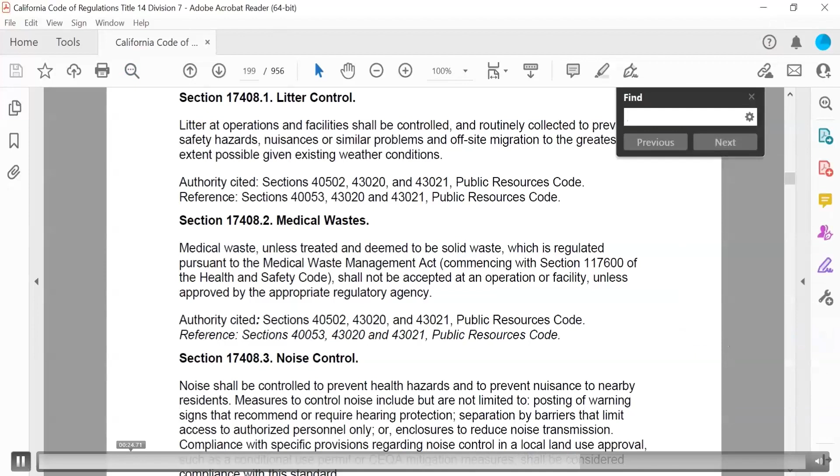Let's say we want to search for the term odor. When we enter our search term, you may notice that a list of suggestions appears. We can search for the term odor, which is found in the document 118 times, odors, which is found in the document 15 times, or odor impacts, which is found once. Let's go ahead and search for odor.

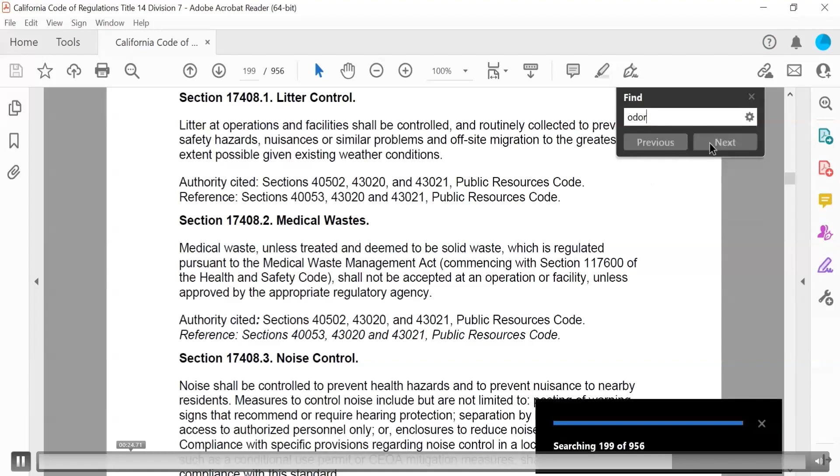You can click Next and Previous to cycle through the different places that the term odor appears in the document. Do take note that when you use the Find tool, the search will begin on the page you are currently on. So if we search while on page 1, it is likely that the search will bring us to the table of contents. However, if you search while on page 100, then the search may begin in the middle of the document.

These basics should help you to quickly find regulations. I recommend saving the PDFs for titles 14 and 27 for easy access. Alrighty, hopefully that helps you a little bit if you're not too familiar with those PDFs.

All right. So statement of standards are either performance standards or prescriptive standards. Performance standards set out expectations and allow for different methods to meet those expectations. So these standards require mitigation measures that minimize impacts, are maintained, and allow for ongoing controls. And when assessing for performance standards, the EA or you will determine if the mitigation measures that are deployed are adequate to protect public health and safety and the environment.

And then for prescriptive standards, these include specific procedures, criteria, or thresholds. And if observations show that the deployed measures and the results of those measures are not consistent with the standards, then a finding of non-compliance can be supported. So prescriptive standards are pretty cut and dry, where specific thresholds are given. If it's not met, then it's not in compliance. Whereas performance standards offer a little bit more flexibility as far as methods to control or minimize, etc.

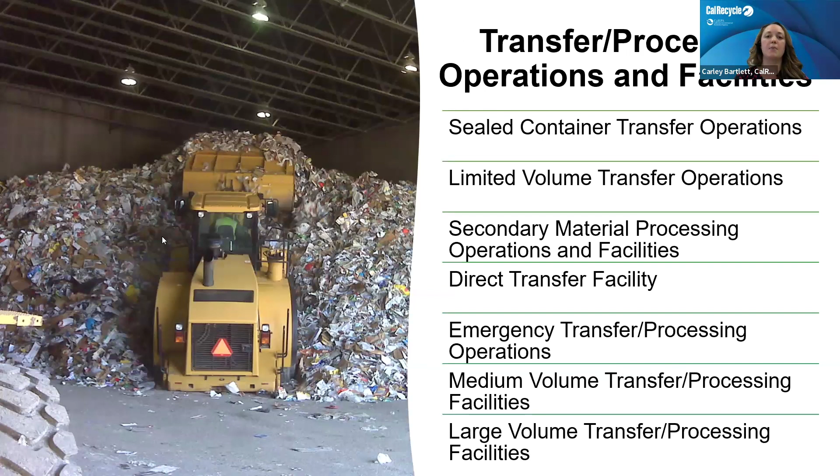Another facility or operation type that we're going to talk about are transfer processing sites. These are facilities or operations that receive, temporarily store, handle, recover, transfer, or otherwise process solid waste. These operations or facilities can also transfer the solid waste directly from smaller to larger vehicles for transport or be utilized for transformation. These facilities are categorized by the type and volume of material accepted.

The regulations for transfer processing sites are found in Title 14. These articles contain regulations that cover general design requirements and siting, operating standards for both operations and facilities, so things like dust control, hazardous waste, noise control, litter control, etc. Article 6.3 covers record keeping requirements. Article 6.35 contains some additional operating requirements for facilities only, so things like communication equipment, site security, site attendance.

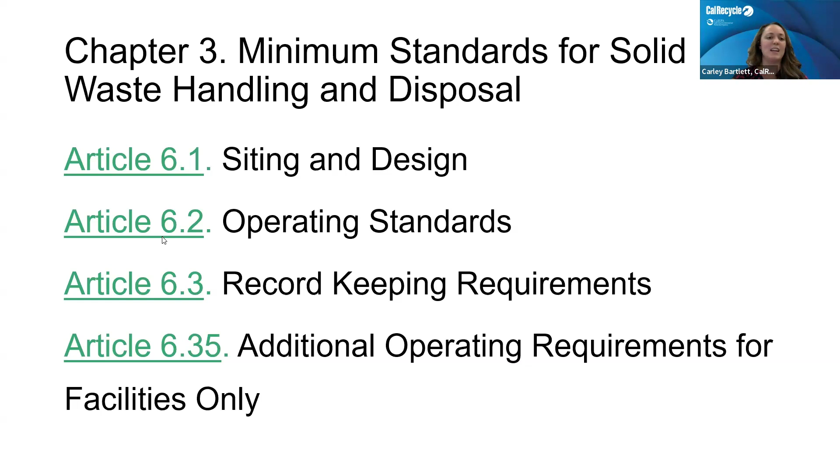Compostable materials handling operations and facilities are permitted by the type of feedstock they accept and the volume of material that is accepted. The regulations for these sites establish standards and regulatory requirements for both intentional and inadvertent composting resulting from handling of compostable materials, so things like feedstocks, compost, chip and ground materials, etc.

The regulations for composting sites are also found in Title 14, and you might be starting to see a pattern here. The articles contain regulations on siting and design, operating standards, site records. Composting sites, though, do have specific articles that contain environmental health standards that cover things such as maximum acceptable metal concentrations in compost and pathogen reduction. There is an article on composting facility site restoration. We're not going to cover that in today's training, but it is there if you are interested.

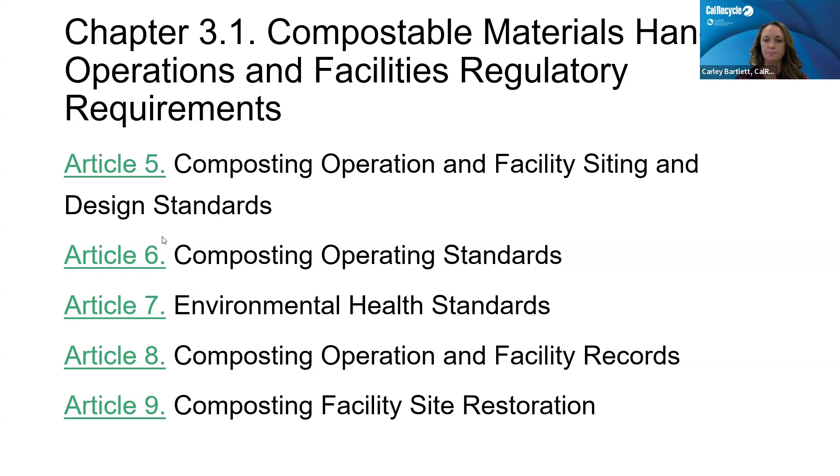The last type of solid waste site that we'll cover today are in-vessel digestion operations and facilities. These are sites that receive solid waste for the purpose of digestion in an in-vessel digester, which is a sealed container or a sealed structure in which the entire digestion process occurs. As we've seen in the sites before, the permit depends on the quantity of material processed and the type of feedstock being received.

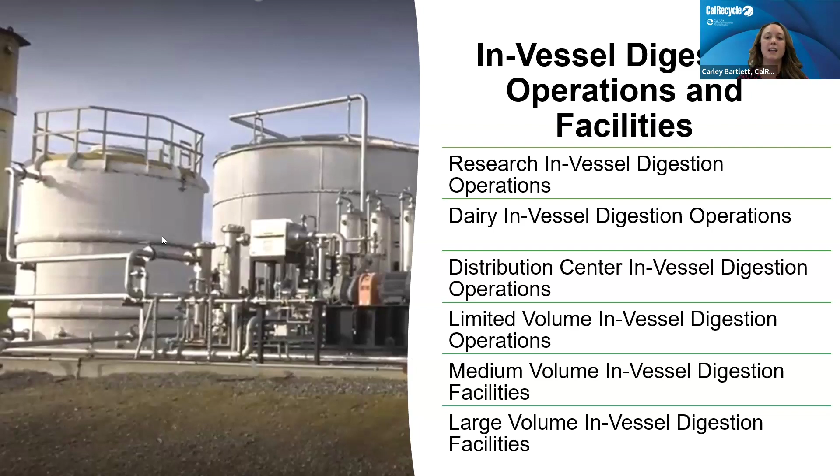The regulations for these sites can be found in Title 14 as well. The articles reference siting and design, operating standards, record keeping requirements, additional operating requirements for facilities only, just as we saw with transfer processing sites. For in-vessel digestion sites, there is also an article to cover digestate handling standards. These include standards on maximum acceptable metal concentrations and pathogen reduction in digestate produced at these sites.

All right, so we have another poll for you, poll number 2. Which facility type is most common in your jurisdiction? Do you have mostly disposal sites, transfer processing sites, compostable materials handling sites, in-vessel digestion sites, or other? I know a lot of folks have closed landfills in their jurisdictions, and we're not going to be covering closed landfills today, but just wanted to give you the option to put that in there.

Right off the bat, I'm seeing most of you have transfer processing sites as the most common type of facility in your jurisdiction, which does not surprise me. That's what we've been seeing in all the trainings, actually. Some folks have disposal sites as their most common site, and then some compostable materials handling, and one other. So I'm assuming that's going to be a closed landfill.

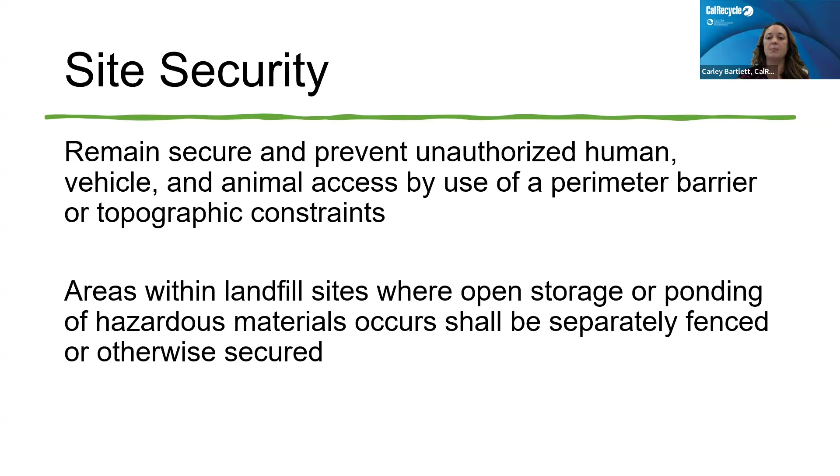As far as maintenance, roads, and equipment go, you should be looking for any issues regarding the state of equipment and site maintenance. The site should be maintained in a good state of repair, and the operator should be implementing a preventative maintenance program to monitor and promptly repair deteriorated or defective conditions. Any on-site roads or driveways should be designed and maintained to minimize the generation of dust and tracking of soil onto adjacent public roads. We'll talk more about dust later on. Those roads should also be safe and maintained to allow vehicles reasonable all-weather access, obviously.

We'll talk about this more too in detail later, but there's going to be circumstances where weather brings big storms that are unusual for the area. There's going to be times where things are just out of our control, right? But those roads still need to be able to allow for reasonable all-weather access.

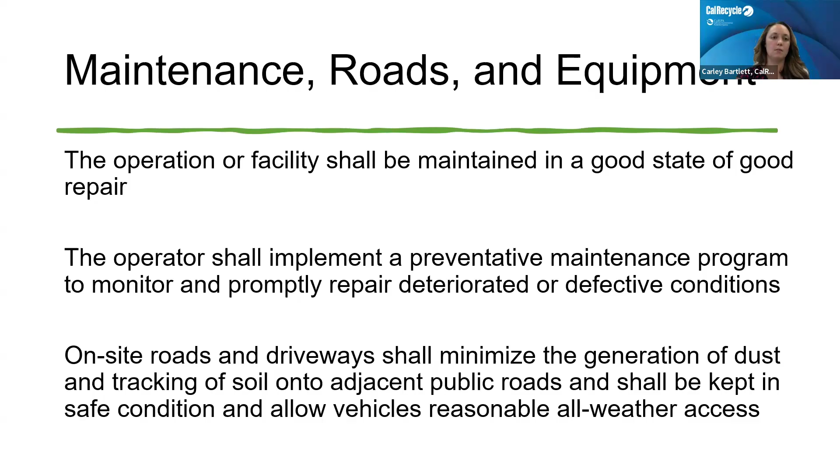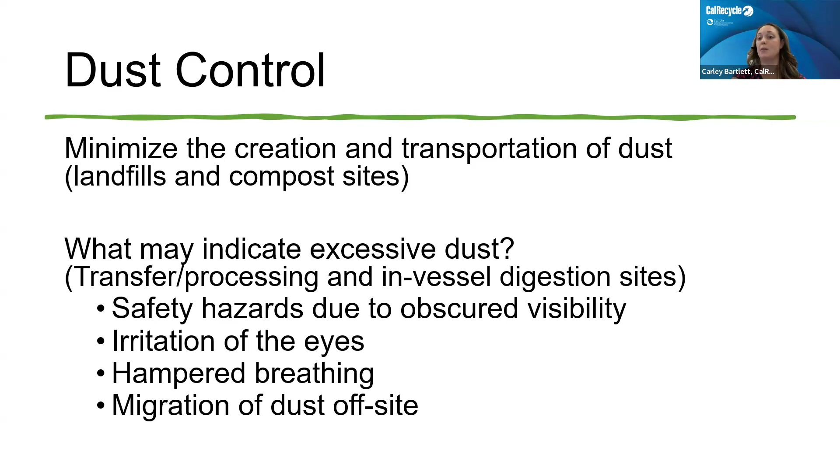Measures to control dust include reducing processing, periodic sweeping and cleaning, misting systems, or ventilation control. You can determine if these control measures are not working if you observe dust accumulating on or off site. Look for dust accumulation on stairs and handrails, dusty conditions within buildings or on-site structures, and definitely observe areas where folks are working—we don't want inhalation problems there, so make sure those buildings are clear of dust.

And make sure that there's minimal dust in areas where the public is offloading waste or on public roads offsite as well.

Traffic flow into, on, and out of the site should have minimal interference with traffic on adjacent public streets or roads, and the operator should control on-site safety hazards and interference with site operations.

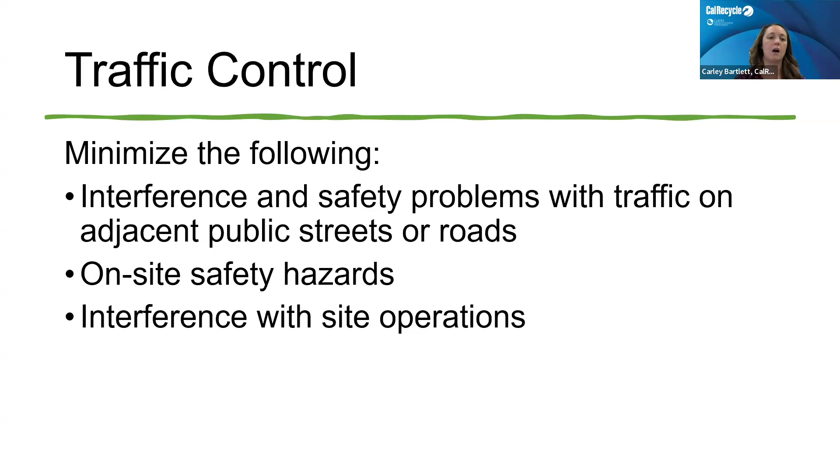Another thing to look for is noise control. Noise should be controlled to prevent health hazards and nuisance to nearby residents. Some measures to control noise include enclosures to reduce noise transmission and altering operating hours. Compliance with the standard should be met if the operator is following the design and operational procedures, but you can always inspect areas offsite to check noise levels and determine if they're being controlled.

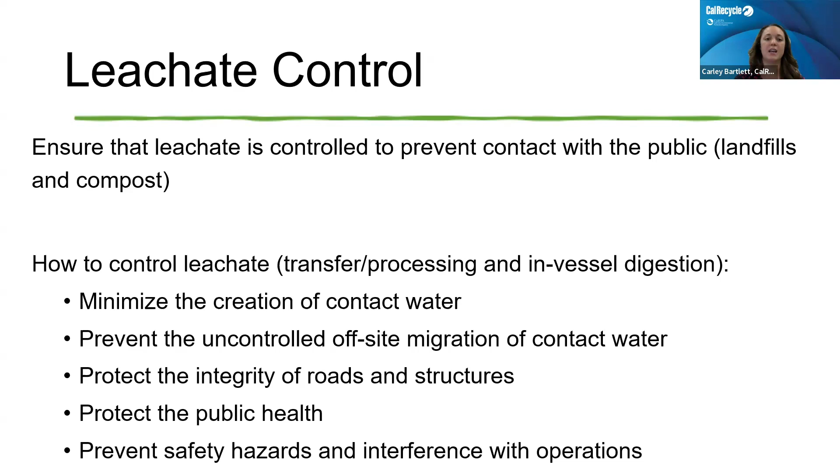So minimizing the creation of contact water, preventing contact water from migrating off site, and protecting public roads in general, structures, and public health. And ponding is usually related to maintenance issues such as potholes or low spots in roads or operating areas. So if you do find leachate, look for oily sheens and odors, especially because these can lead to other problems down the road, like, again, odor issues or vector harborage areas.

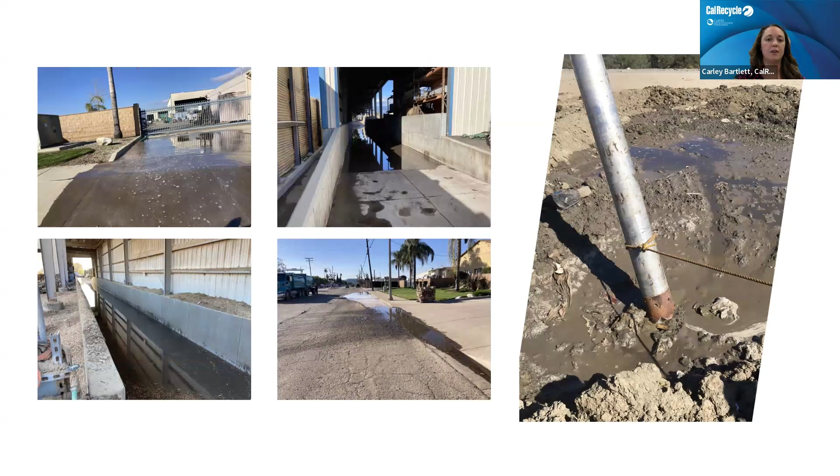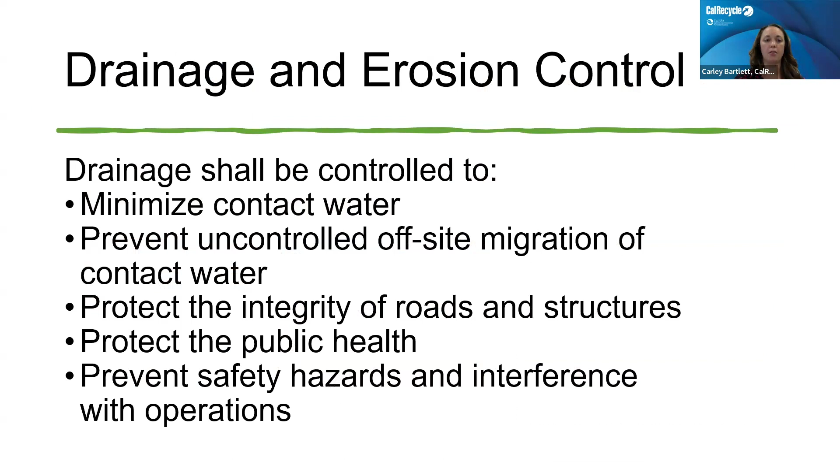So in general, the drainage and erosion control measures are written the same for leachate control. Operators should be minimizing contact water, preventing offsite migration, protecting roads, structures, and public health. And drainage and erosion issues are typically related to maintenance and weather events. So if a lack of maintenance in typical weather is causing problems, then you may need to reassess any control measures that are listed in the operating documents.

However, unusual and extreme weather events that cause problems may not be cause for a violation so long as the operator addresses the problem in a timely manner. And unfortunately, it seems like these unusual and extreme weather events become more and more common. So it's good to keep that in mind, especially because if we are seeing these problems more often, operators are going to have to be dealing with the potential consequences. So being prepared is always a good thing to keep in mind.

And then lastly, for control, we have nuisance control. Titles 14 and 27 state each operation or facility shall be operated and maintained to not create a public nuisance. So for Title 27, the regulations state that disposal sites should be operated and maintained not to create a public nuisance, which is defined in the California Penal Code.

Public nuisance, again, is defined in the California Penal Code. Whereas other sites, so like transfer processing, composting, and in-vessel digestion sites, should be preventing the creation of a nuisance, which is defined within Title 14. So just wanted to point out that there's a slight difference in the wording in the regulation and also the definitions of those terms, just to keep that in mind.

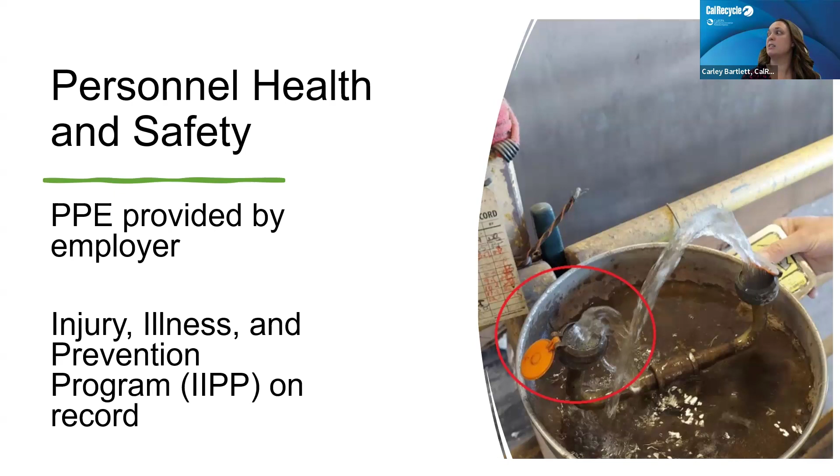The site, however, should have an injury, illness, and prevention program or an IIPP on record. It is not your responsibility to enforce the IIPP, but it is your responsibility to make sure that there is an IIPP on record. Emergency response measures are critical. Each facility should have adequate communication equipment available to site personnel to allow for quick response to emergencies. So look for spotters to be carrying radios so they're able to get a hold of somebody to deal with that emergency as quickly as possible.

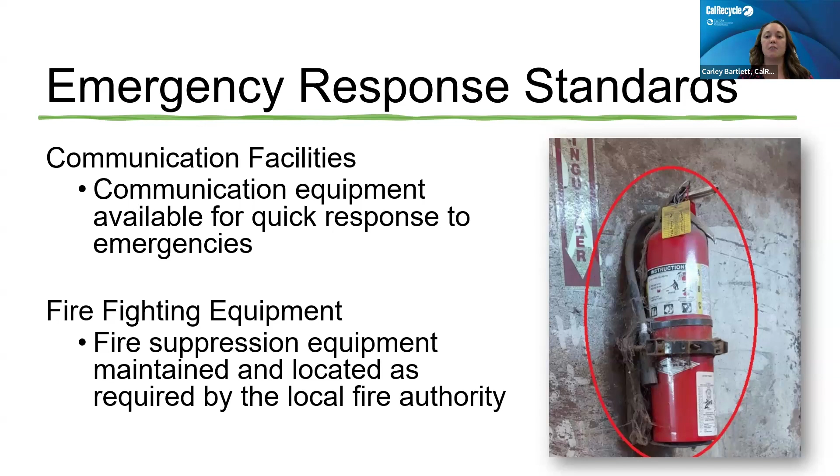So each facility should also have fire suppression equipment continuously available, and it should be properly maintained and located as required by the local fire authorities. So I can't tell you how many times I've seen photos of fire extinguishers looking like this, where it's covered in cobwebs and dust, and oftentimes there's a pile of stuff right in front of it. So clearly it's not accessible, but it also hasn't been maintained. So again, look for unserviced fire extinguishers and clear access to fire suppression equipment.

Yeah, so we have no traffic control and we have no spotters. Right. So there we go. So any site, oops, missed a slide, I don't know what happened there. So yes, we need to have a spotter, right? So especially when there's a facility or an operation that has a lot of vehicle traffic, there needs to be a spotter making sure that that traffic is being directed, and then also that folks are staying safe.

There was a photo or video, I can't remember, that I saw where the truck driver was gonna off-haul some waste, exited the truck and was climbing into the trailer to who knows what, maybe unjam something, but definitely not a safe thing to be doing. So having a traffic spotter or just a safety spotter in general would help prevent that instance from occurring, and also any potential injuries from occurring as well.

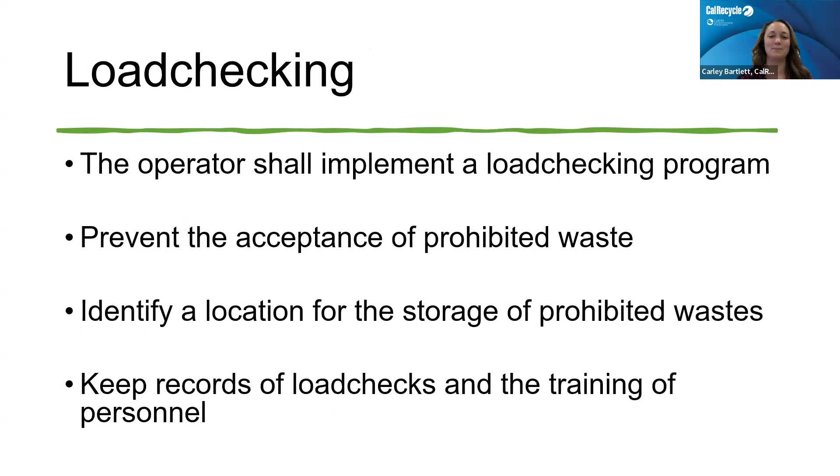So first and foremost, how can you determine if load checking is occurring? Well, you can look for load checking records and determine if those load checks are being documented or if load checking is even occurring. So take a look at the records. Oh, great, there's load checking documents here. Chances are that it's actually occurring. If there's not documents there, okay, well, we're either looking at the documentation's not being done and or the load checking is not occurring in the first place.

So a good way to determine if load checks are occurring is to look for waste that the facility does not accept. So like e-waste at a C&D site or treated wood waste or other hazardous waste. While at the site, watch the load checking process and observe how thorough that process is. Are the load checkers just looking under a tarp real quick, saying, you're good? Or are they actually walking around the vehicle, making sure that the waste is acceptable or not? Are they watching the waste offloading process from larger trucks and making sure that that waste is acceptable and not hazardous?

Also make sure that there's a specific area for conducting a more extensive load check if any prohibited materials are suspected. And again, making sure that personnel training records are available. Again, we'll talk about record keeping a little bit later on, but record keeping is definitely critical, especially for load checking as far as employees are concerned. So in general, sites should not be accepting hazardous waste.

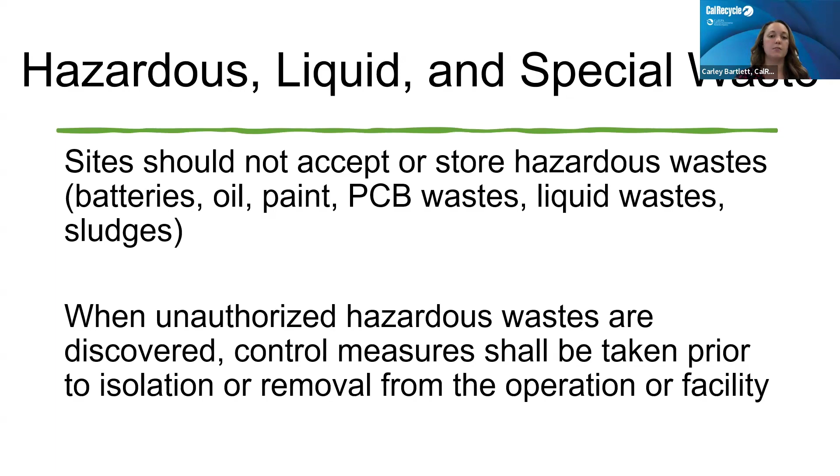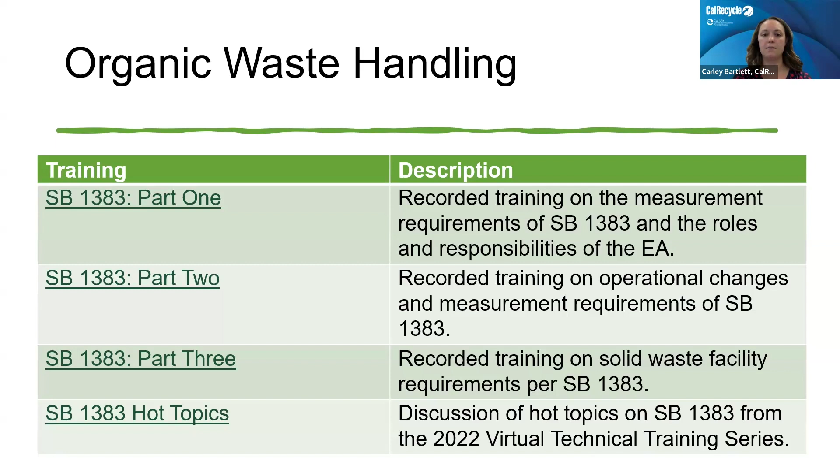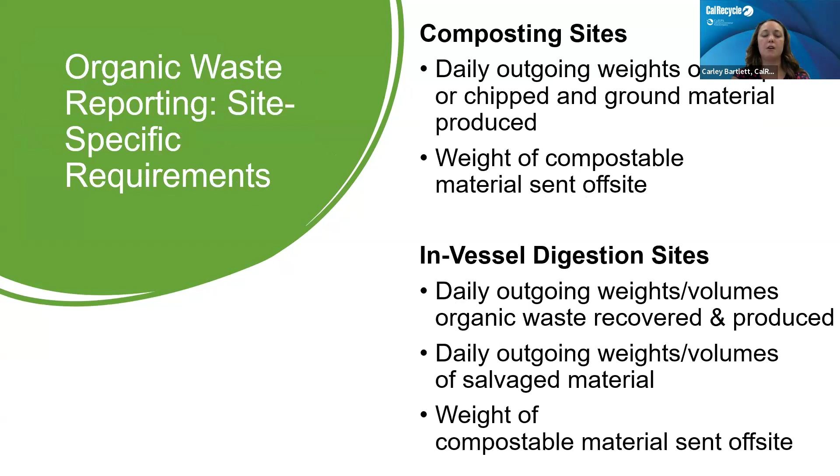And then there's also some organic waste reporting requirements. I'm going to skip over these ones for now, but those all are listed in that resource document that I've mentioned. Alrighty, so we're going to go ahead and jump over to a breakout room activity. Now that we've covered general standards that do apply for all solid waste sites, we're going to start diving into facility-specific standards.

So for the facility-specific standards section, we're going to be working in breakout rooms to create a slide. Each breakout room will be assigned a regulation, and you must work with your team to find the regulation in either Title 14 or 27, and then work together to put together a slide. We're going to be doing this activity in Google Slides, so you can all hopefully edit the slides. We will be posting the assignments and the links to the slides in the chat momentarily. Once you are assigned a room, you should be able to access those links according to whichever room you are assigned.

So basically, just like earlier, you're going to be prompted to join your room. You're going to introduce each other and choose a facilitator, and I will have these slides shared out to the breakout room on my end. Once you've done that, you're going to work with your team to create a slide. Each breakout room will have a CalRecycle staff member to help with any technical issues, and they will be sharing their screen in case any of you are unable to open the Google Slide document.

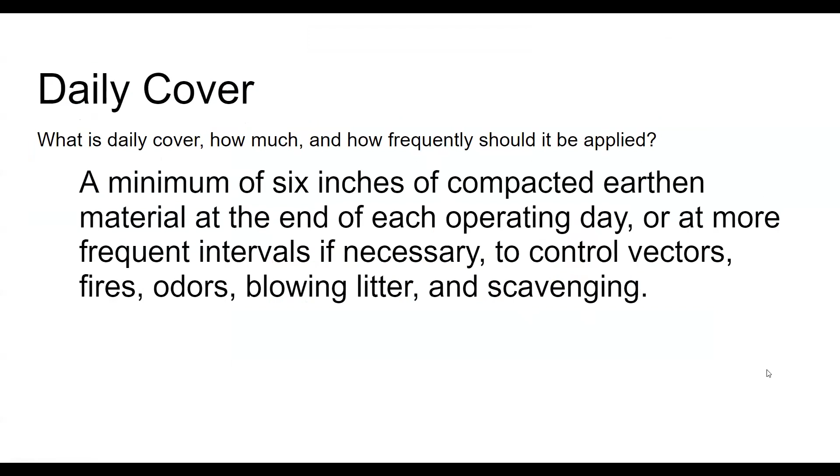Perfect, thanks Adam. Yeah, that one's pretty straightforward. And I like that you included 'more frequent intervals if necessary to control vectors, fires, odors, blowing litter, and scavenging.' Again, this is where you're able to use implementation tools like permits, terms and conditions, etc., to implement more stringent standards or requirements than what's listed. So that's always an option.

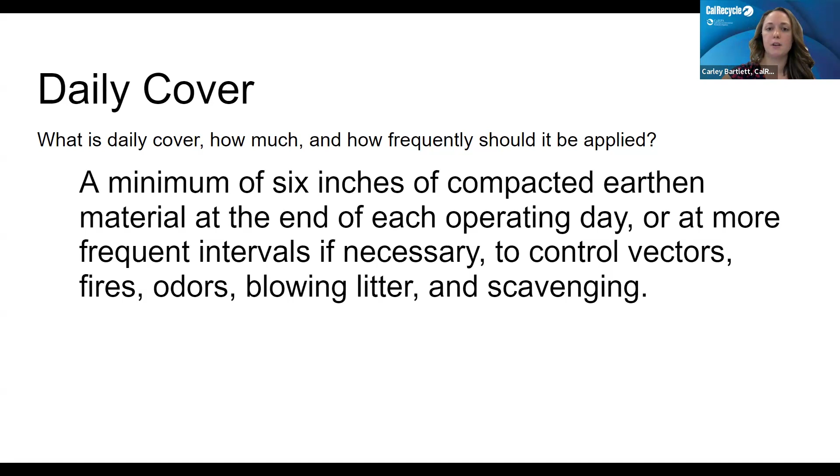Melissa, could you go to the next slide real quick? I do have a couple extra things I wanted to chat about. There are allowances for daily cover materials other than compacted earthen material, referred to as ADC, or alternative daily cover. All types of ADC must be approved by you, the EA, in writing prior to use.

Next slide, please. So here's a list of the 11 approved ADC material types per Title 27 CCR 20690. The use of any of these 11 approved material types does not require a site-specific demonstration project. This section also prescribes the required depth for each of these material types.

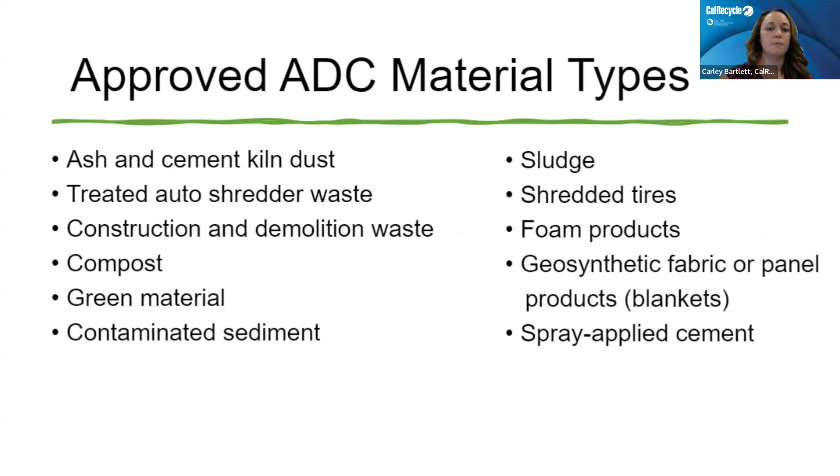And then next slide for a couple photos. So things to look for is whether the operator is using the appropriate cover material as described in the operating documents. Look to make sure the daily cover or ADC is in place by the end of the day, and that it's still in place and effective by the next morning before operations begin. You can look for any loose waste and unraveled covers, and if tarps are being used, make sure there are no tears or holes. All right, thank you so much, breakout room 2.

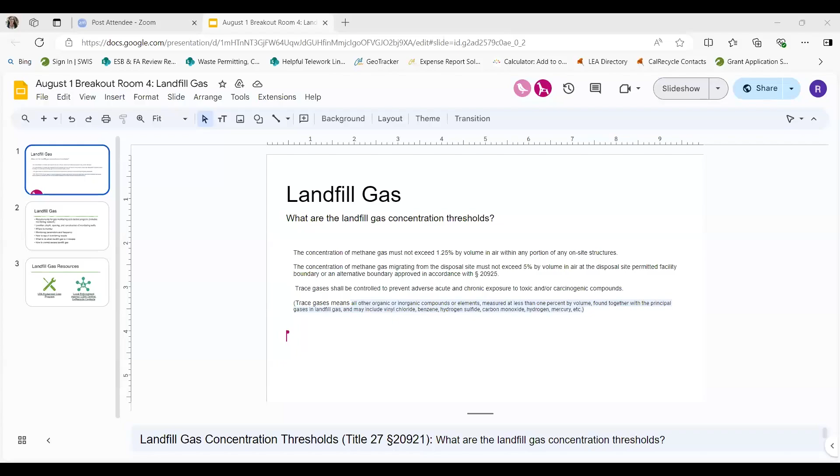Okay, so under Article 6, 27 CCR 20921, subsection A is primarily what I would look for initially, because that's where it quantifies your 1.25% and 5% threshold limits, and also mentions trace gases. Subsection B has EA filing requirements and CIWMB concurrence and timeline requirements.

Let me jump back over to cover that real quick. The concentration of methane gas must not exceed 1.25% by volume in air within any portion of any on-site structures, and the concentration from the disposal site migrating from the disposal site must not exceed 5% by volume in air at the disposal site permitted facility boundary. And then there's trace gases.

With trace gases, we had to navigate out and back to specific definitions, and we pasted in the text there for those definitions. We also talked about how, if that did not address a certain question regarding whether a trace gas is subject or not subject to control measure requirements, we would reach out to CalRecycle staff for support on that. Is there anything I missed, Kathy, or Rachel? No, this looks good. No.

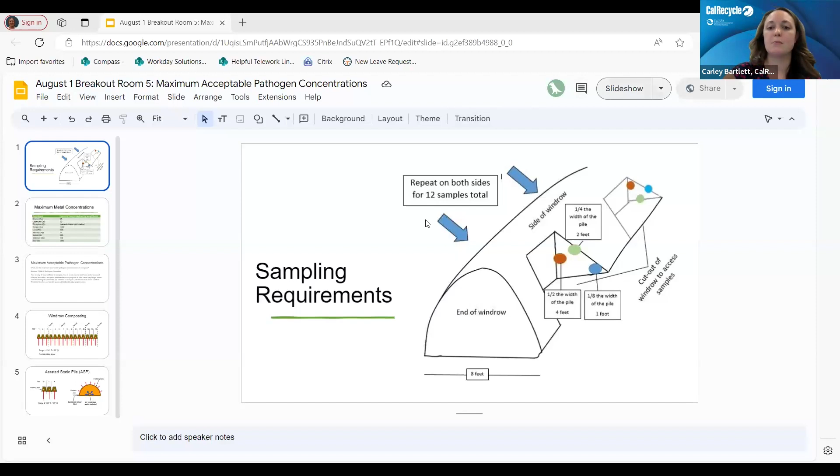I had you guys talk about or cover maximum metal concentrations, but I did want to talk about sampling. I'm sorry, you guys covered acceptable pathogen concentrations, I wanted to cover sampling and metal concentrations before we get there.

Environmental health standards require compost to be sampled for metals, pathogens, and physical contaminants. There's a requirement that compliance with these standards is verified prior to the point where the compost is removed from the site or beneficially used on site. The regulations prescribe a method for obtaining a random and representative composite sample from compost windrows. On the screen here is a diagram showing what is required for obtaining samples. The protocol requires the operator to take 12 samples from 3 different depths, each at a different cross section. So essentially, if an operator is taking at least 12 samples, although they're welcome to take more, they would be required to cut out 4 different spots within the windrow.

Visually, we're only able to see 2 of those cutouts here on one side of the windrow. Within each of those cutouts, the operator should be taking a sample from each of 3 depths. Red is 1/2 the width of the windrow, green is 1/4 the width, and blue is 1/8 the width. Doing this 4 different times allows for a composite sample of at least 12 mini samples to create 1 composite sample.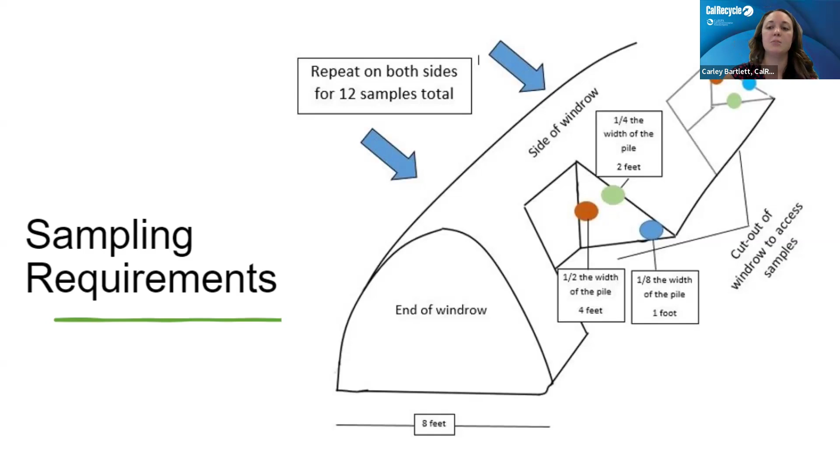Operators should be sampling for environmental health standards every 5,000 cubic yards of compost produced, and if sites produce less than that, they should be sampling at least once every 12 months.

Next slide please. Once a sample is taken, it must be sent to a California Department of Public Health certified laboratory, a CDPH certified laboratory. Compost shall not contain metals in excess of the concentrations listed here on the slide. You may note there is no maximum concentration for chromium, but it still should be measured and recorded.

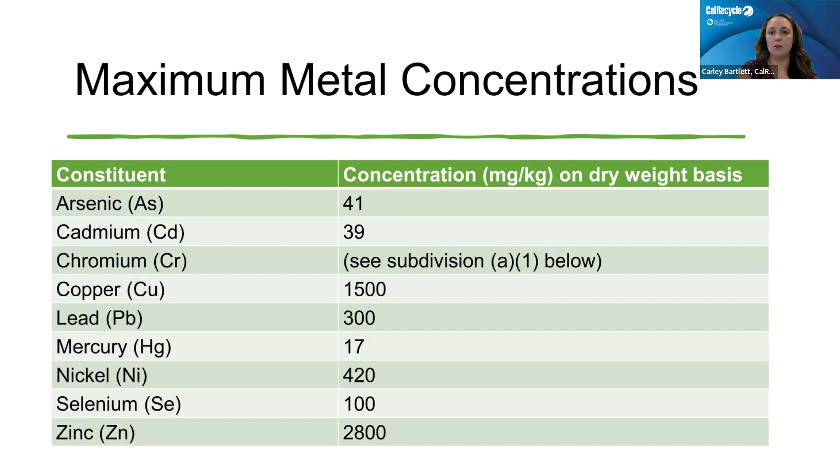Now that we've covered those, I'll go ahead and pass it over to our breakout room 5 facilitator to talk about maximum acceptable pathogen concentrations.

We were assigned what are the maximum acceptable pathogen concentrations in compost. We found that in section 17868.3, pathogen reduction: the density of fecal coliform in compost that is or has at one time been active compost shall be less than 1,000 most probable number per gram of total solids, dry weight basis. And the density of Salmonella bacteria in compost shall be less than 3 most probable number per 4 grams of total solids, dry weight basis. That's what we found in that section.

That's it. So again, we're looking at specific thresholds, specific quantities, prescriptive standards. If an operator or site is not meeting these concentrations or is in excess, then they're not in compliance with that standard.

Next slide, Dana. So how must pathogen reduction occur in compost windrows? For windrow composting, which has the longest pathogen reduction period, active compost should be maintained at a temperature of 131 degrees Fahrenheit or higher for a period of at least 15 days. Windrows should be turned at least 5 times during that period. Temperature readings should be taken every 150 feet to 200 cubic yards of compost for each day of pathogen reduction, so once a day for 15 days or however long the pathogen reduction is occurring, and that should be taken at least 12 to 24 inches below the windrow surface.

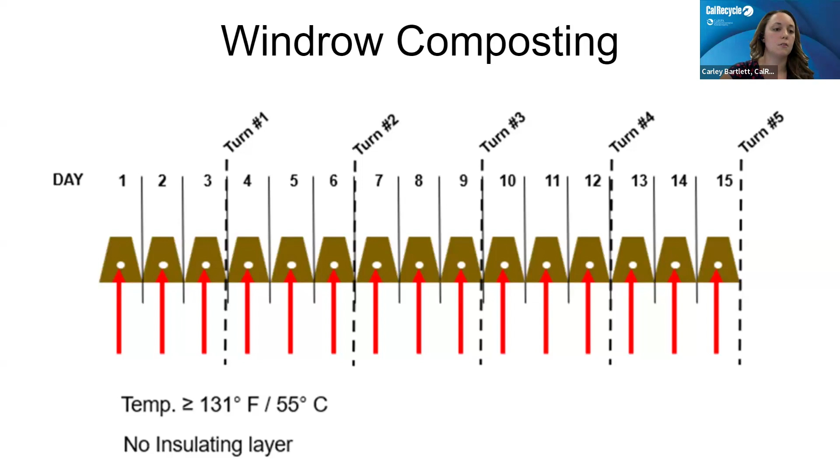Next slide. For the aerated static pile composting process, all active compost shall be covered with 6 to 12 inches of insulating material. Again, the active compost shall be maintained at a temperature of 131 degrees Fahrenheit or higher for 3 days for pathogen reduction. Temperature should be taken once every day, per 150 feet to 200 cubic yards of compost, and taken 12 to 18 inches below the point at which the insulation meets the active compost. So if the operator is using 6 inches of insulating material, the temperature probe should be down to at least 18 inches within the entire pile itself, taking that temperature in the active compost while trying to avoid the insulating layer.

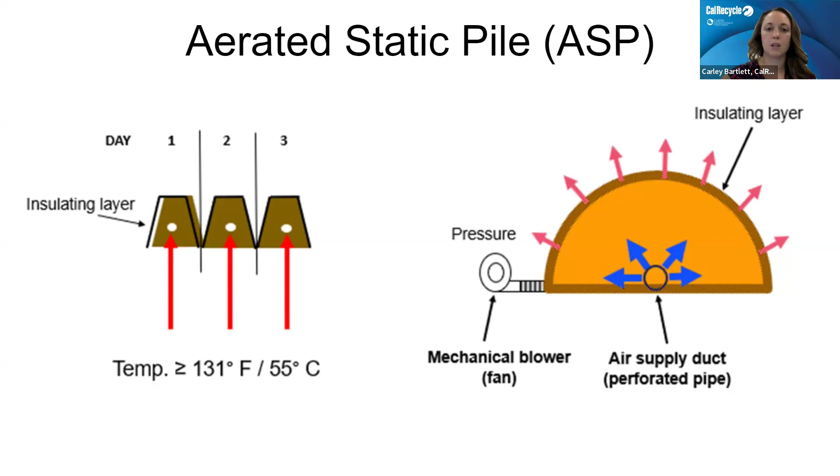Thank you so much, breakout room 5. We have one more, breakout room 6, and they covered physical contamination limits for us. I'll go ahead and pass it over to breakout room 6.

Okay, so for physical contamination limits, we were told to look up the regulations in the compost. In addition to visual observation of the compost, the operator is also required to do the physical contaminant limit testing in the lab. The regulations state compost shall not contain more than 0.5% by dry weight of physical contaminants greater than 4 millimeters - I think that's the most crucial point, that 4 millimeter limit. There's also another condition that states no more than 20% by dry weight of this 0.5% shall be film plastic greater than 4 millimeters. And if the compost material contains in excess of this limit, then it should be designated for additional processing, or disposed of accordingly. That's the main requirement in the physical contamination limits.

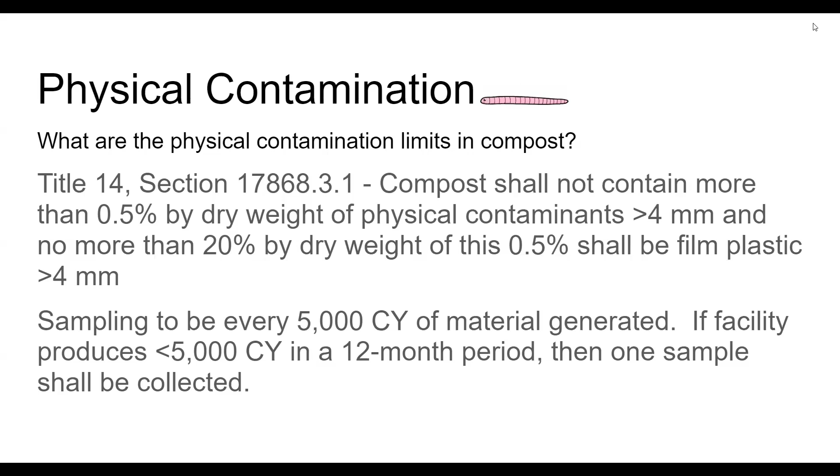And the second thing, as you had pointed out, sampling has to be done for every 5,000 cubic yards of material generated, and if it's less than 5,000 cubic yards in a 12-month period, then they have to sample it once.

Yes, absolutely. Perfect. Thanks so much, breakout room 6.

And then just real quick, as far as meeting this standard, one option is, well, for finer compost material, oftentimes operators are just going to take that composite sample and send it to a lab for analysis. However, for coarser materials, it is an option for operators to use the FIM method, or the field indicator method. I have a link in the resource document if you're interested. And that allows for operators to estimate physical contamination limits in coarser materials out in the field.

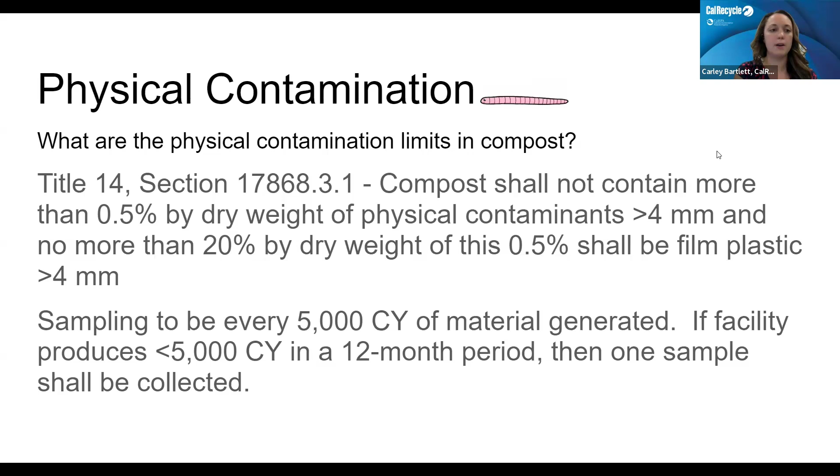So I'm not going to have too much time to cover that. So just something to look into if you're interested. Next slide, I do want to talk about compost fires and odors real quick, since we're on the topic of compost.

And by the way, I love the little worm. It's very cute.

Compost fires are a common issue at composting facilities. And in order to prevent fires, the operator should be monitoring the temperature of compost windrows and piles. They should be stocking adequate water supply for fire suppression, and isolating any potential ignition sources from combustible materials.

And although that's required of the operator, you are always, as an EA, able to take a probe with you and stick it in a windrow and see where they're at. That's going to help you determine if they're meeting their pathogen reduction requirements, along with the testing results for the environmental health standards. Good composting practice leads to good fire prevention.

So things like adequate moisture, good feedstock mix, regular movement of materials, and doing like a first in, first out inventory control. So moving material along kind of like an assembly line order, right?

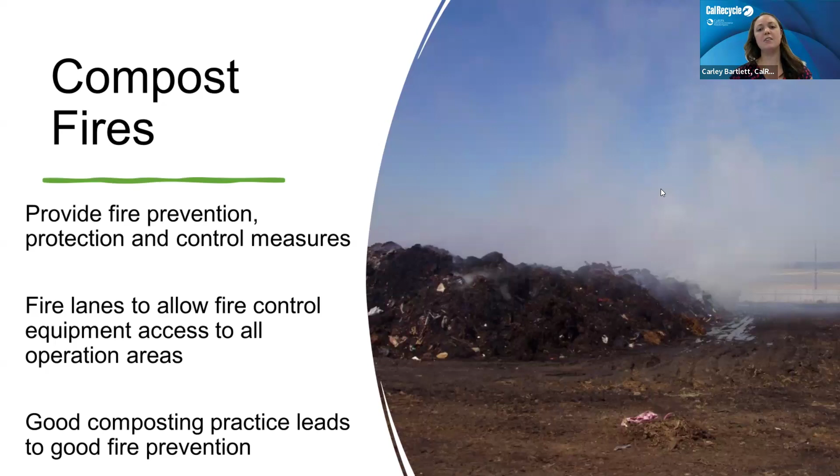Next slide, please. And as far as odors go, LEAs do have jurisdiction over odor complaints for compostable material handling facilities, while air districts have jurisdiction over all other sites. Odors are one of the most commonly cited violations at composting sites, and handling activities at these sites should be conducted in a manner to minimize odor impacts and not to cause a nuisance.

So composting sites are required to have an odor impact minimization plan, or an OIMP, which is an operations plan on how the operator will minimize odors at their facility. If you find that the OIMP is being followed, but there's still some chronic odor impacts that are occurring, then

the operator should, one, revise their OIMP, but you're also welcome or able to require the operator to do a best management practices feasibility report, which is basically just a tool that allows for the operator to assess their current best management practices and make any operational changes to help further minimize odors.

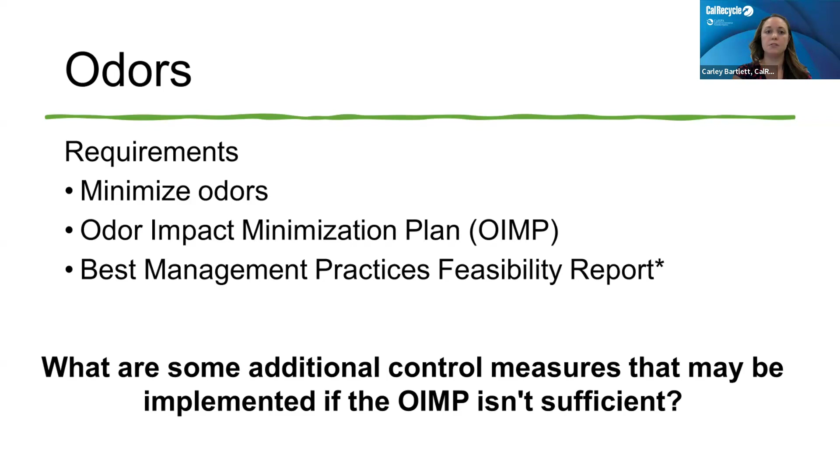All right, thanks so much, breakout room 6. All righty, so I'm gonna go ahead and share my screen again here. Just give me 1 second.

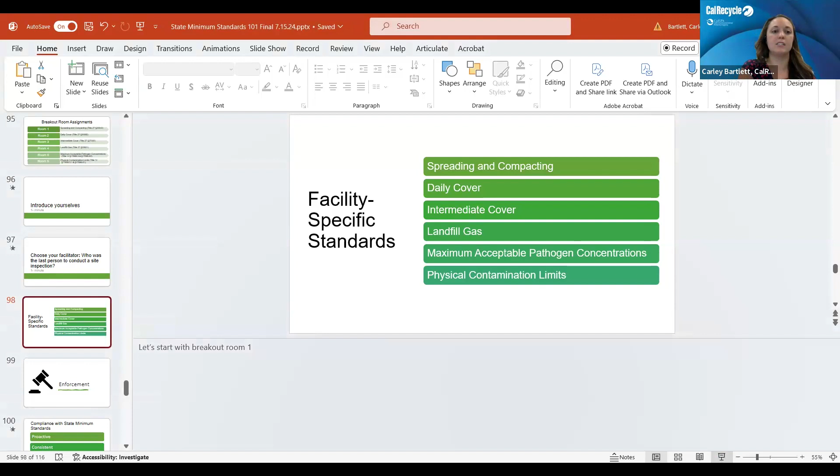So we've talked now about general state minimum standards that apply to all types of facilities. So we talked about facility specific standards, and let's talk a little bit about enforcement. There we go. All right, so the objectives for site compliance with state minimum standards are to obtain consistent long-term compliance and to ensure that solid waste operations are not creating a threat to public health and the environment.

And these objectives can be met by being proactive in that you provide operators ongoing education and establish a clear mutual understanding of the expectations that are laid out in the standards. It's also important to be consistent day to day and site to site, and also to document and communicate clear, complete, and evidence-based inspection reporting that includes detailed description of compliance issues, photos, regulation citations, and history of compliance.

Obviously, nobody wants to take enforcement to the higher levels where you might have to go to court, but if it ever gets to that point, documentation is critical. Inspection notes are useful to include in inspection reports. You can use notes to document unusual occurrences, any upcoming deadlines. You can use these to record measurements that you took, for example, like temperatures at the windrows or any landfill gas measurements. And some EAs may even use these notes to document positive instances.